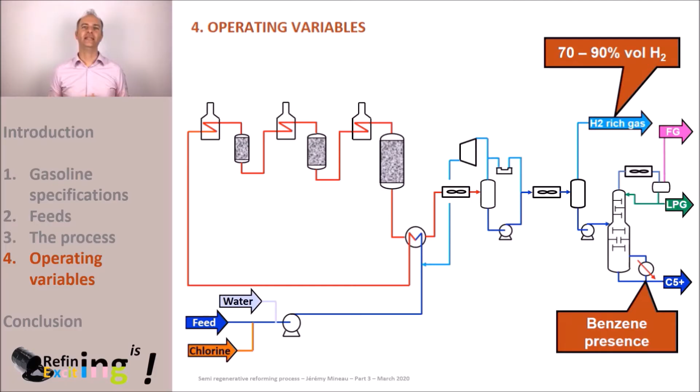Note that when producing high-octane number gasoline, a bit of benzene is expected to be produced. So, the presence of benzene in the total reformate has to be handled. I remind you that the benzene content in gasoline is limited to 1% in volume. Each refinery has its own technique to make sure they do not go over this specification.

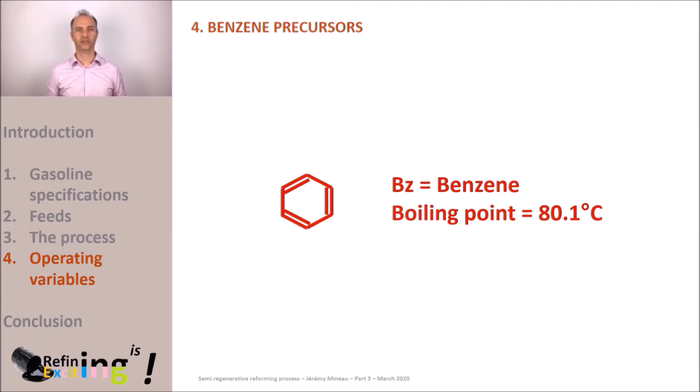But why do we find benzene in the reformate? Simply because benzene is naturally found in the crude, but there are also benzene precursors. These benzene precursors are the molecules that will unavoidably become benzene in the reformer, even under soft operating conditions. Among these precursors, we meet methylcyclopentane, benzene itself, and cyclohexane.

In their natural state, in the crude, the following precursor contents can be found. Between 0.4 and 2% in volume of benzene, with an average value of about 1%. For methylcyclopentane, this is between 1.5 and 5%, with an average value of about 3%. For cyclohexane, the value is between 1 and 5%, with an average value of about 3%. So, the total precursor content will be between 3 and 10% in volume, with an average value of about 7%.

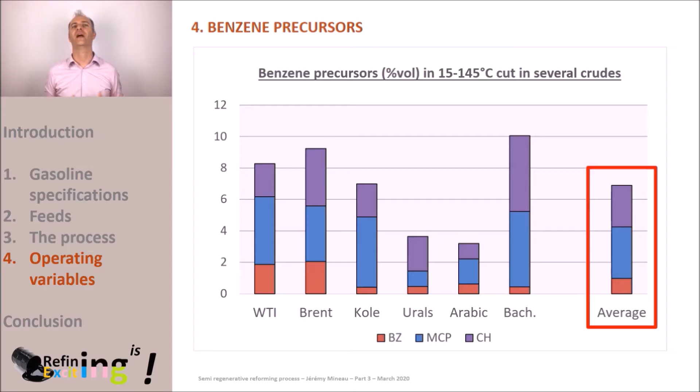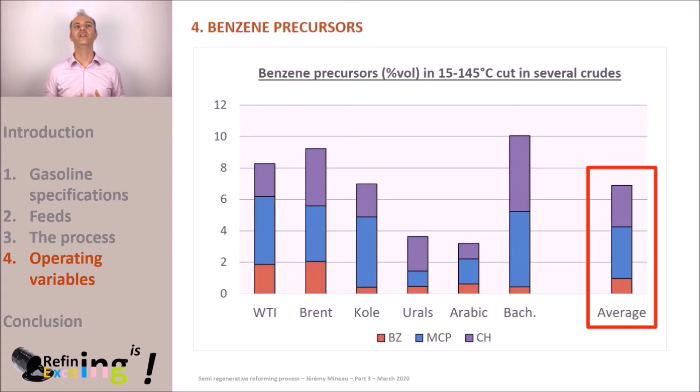If the benzene and its precursors are left in the heavy naphtha, there is a risk of producing a total reformate with between 3 and 10% volume of benzene and an average value of about 7%. These concentrations are very difficult to manage if the specification of 1% volume is to be achieved in the finished gasoline product. So, what can we do about it?

Part of the solution consists in doing what we said in the first video. That is to put a certain quantity of the benzene and benzene precursors into the light naphtha. If, for example, the objective is to recover 80% of the benzene and benzene precursors in the light naphtha, we can aim at a benzene content in the total reformate of 0.6 to 2% volume with an average value of 1.4% volume. But this is still too much to comply with the specification of 1% volume benzene in the total gasoline.

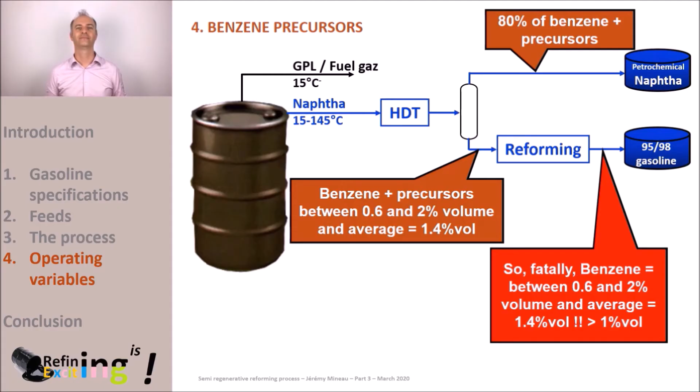Another part of the solution consists in installing a column downstream the debutanizer. At the top of the tower, we withdraw a light cut from which we will extract the C5 and C6, which are lighter than benzene and which we will call light reformate. Then the medium weight reformate, where the benzene will be concentrated, and lastly the heavy reformate. In the heavy reformate, we will target a content of less than 1% volume benzene.

The benzene-rich cut is usually sent to a petrochemical site. However, some refineries have no means of exporting their benzene-rich cut to a petrochemical plant and may handle the problem differently, by hydrotreating the benzene, for example.

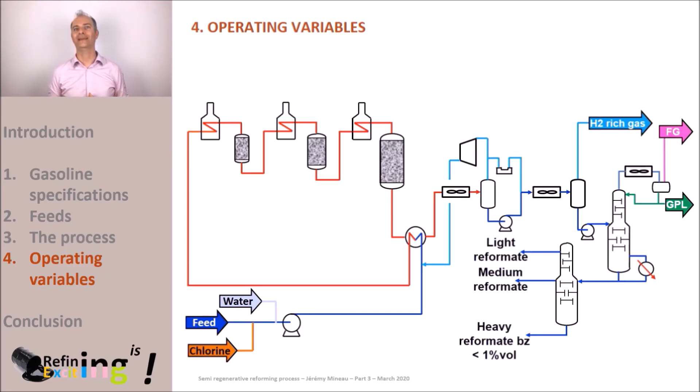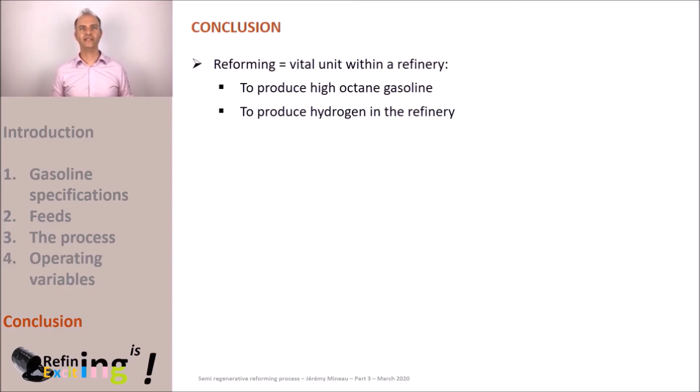And so we reach our conclusion. One thing to note is that every refinery has at least one reforming unit, either semi-regenerative or continuous regenerative. This unit is vital in order to produce high-octane number gasoline, but also to produce the hydrogen required for the refinery to run correctly. These are dangerous units as the fluids are under pressure at high temperatures and there is hydrogen present. They also convey products with a high benzene content.

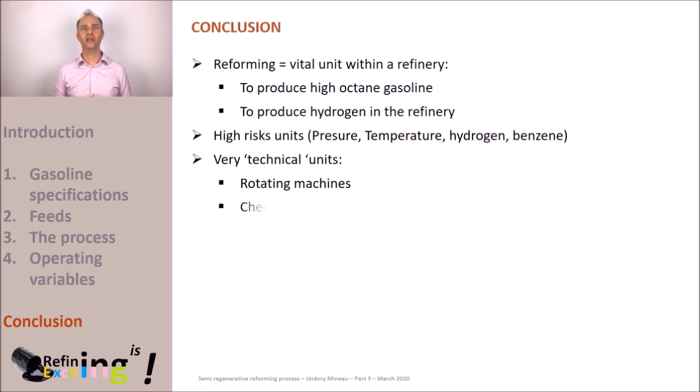The units are highly technical as they use rotating equipment, chemical reactions, and also fractionation processes. For the semi-regenerative reformers, the catalyst has to be regenerated at regular intervals, and catalyst regeneration is a delicate operation. These units change over time. Advantage can be taken of the fact that they naturally produce benzene in order to recover this cut, in which case we can aim at benzene contents in the order of 40%.

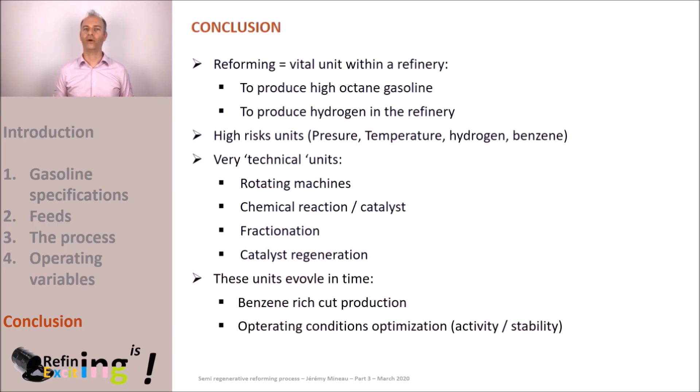The way the unit runs can also be optimized in terms of catalytic activity and stability by optimizing the operating parameters. I hope that these videos will have enabled you to discover the universe of catalytic reforming.